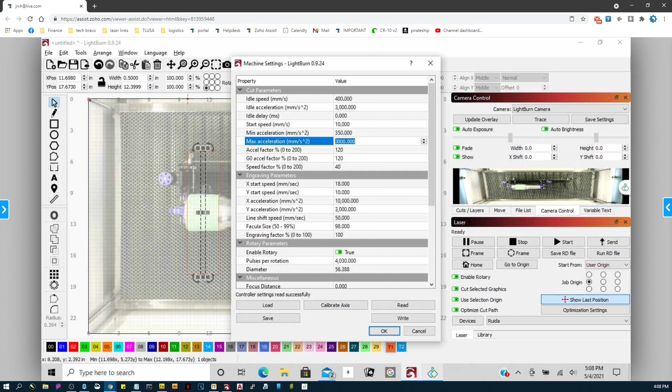Now the rotary is going to be the A-axis. You'd go back into Calibrate Axis and pick A. That way you can also dial in your steps per rotation, because this does the same thing, I think. If you requested, in the A direction, the direction the cup spins, that square to be 2 inches, and it came out 1.98 inches, you put in what you actually got, it'll fix the step length, and then you write it to the controller.

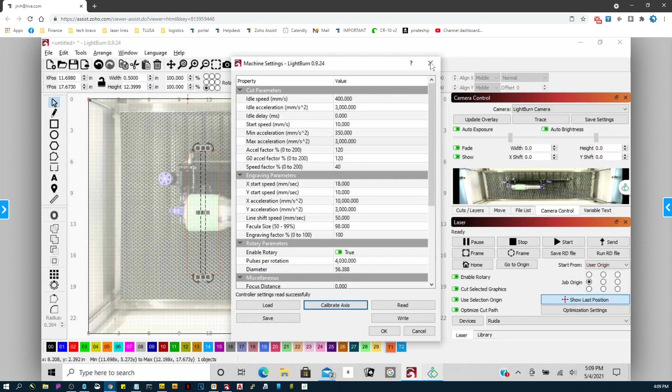So you can calibrate your axes using this tool right here and dial it in so it's absolutely dead on. Now, where you measure the diameter of the cup matters.

Because I believe that stuff is taken into consideration in how it outputs to the rotary device. So when you're in rotary setup, one thing to mention, if you ever see any erratic behavior, especially if you use test or if you frame from here, from the control panel, from Lightburn, it'll mess up. Your y-axis will start moving, and the rotary won't turn, and lots of crazy stuff happens.

I was originally doing the frame from Lightburn, and you and Chris put on there not to do that. Right, yeah, and I got it to work because of that.

Some of our old lasers, the ones with the 5-pin rotary, had a switch on it. About 99% of all the other Chinese lasers out there use the y-axis for the rotary, which means you have to unplug a connector where your y-axis goes and plug your rotary into there, or flip a switch, or turn the power off and change something. Whereas ours uses a different channel so that we don't have to take the y-axis out of play, and it's convenient because it allows these rotaries to be plug and play, and they're hot swappable, so you don't even have to turn the power to the machine off. You just plug it in and it says, oops, hey, there's a rotary, we're ready to go.

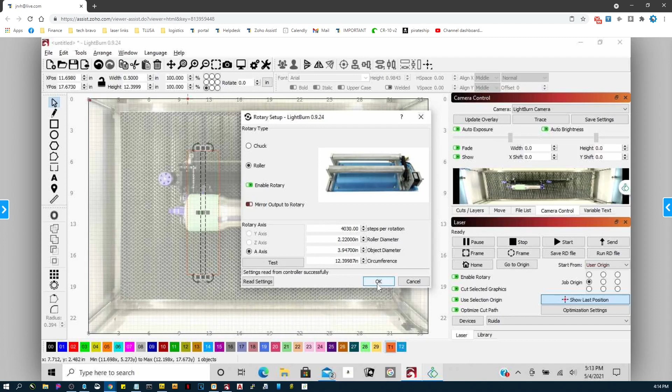I just used the caliper and done just like he did in the video, measured top, but yeah, I got it to work out. I may have to fine tune that. Okay, awesome. Well, you worked through it and did a proof that you could get it done. So that's cool, that's cool.

I've been hearing about acrylic, and I'm really liking it. I've been making keychains and stuff, but I'm getting a lot of white residue. I have to take a toothbrush and clean them, wash them. They look good, but you said something about doing something that would cut down on all that.

Yeah, especially on engraving. On cutting, if you're not worried about a flame polished edge - a perfect flame polished edge - you could just crank the air up and that'll blow all that stuff out the bottom.

Usually when I'm cutting, if I'm going to engrave and cut, I'll leave the paper masking on the bottom side and lay it on the honeycomb, and that gets rid of any of those reflections that always happen off the honeycomb instead of having to stand it up on magnets or chock it up on a piece of wood.

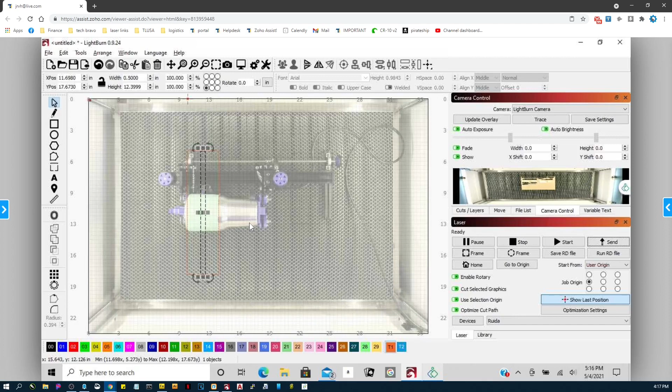If you're doing edge lit, where you light it up with an LED, one of the signs or one of the little table stands, the little holders, then you don't need a very deep engraving - you just barely want to mark the surface. And you've got a Nova 35, right? Yes, 100 watt.

So yeah, you can dial down low enough where you can get some really precise dots, and it's not as much resolution as you think.

I'm doing some experiments based on Russ Sadler's formula for photo engraving, and I'm doing the parts with the high res lens now. You'd be surprised how fast the mirrors and gantry move back and forth affects the beam signature. If you get too fast, your dots that you're trying to lay down - which is ultimately what you're doing when engraving, putting dots down - start looking like dashes. And if your focus is off or your line interval is too high, they overlap one another and it blows out all the detail. So people think, ooh, it's high resolution, I'll put the HR head on there and set it up to 1800 dots per inch and get a perfect photo. And it ain't like that.

So that's kind of what I'm going through right now. If you want to dig into that and look at it, let me pull it up in your browser and I'll leave it open, so you can refer back to it or make a bookmark, whatever you like. It's interesting stuff.

I know how the lasers work, and I know the theory behind how the laser is ionized and how the tube works, that kind of thing. But this really opened my eyes to the way it messes with the output in a practical sense.

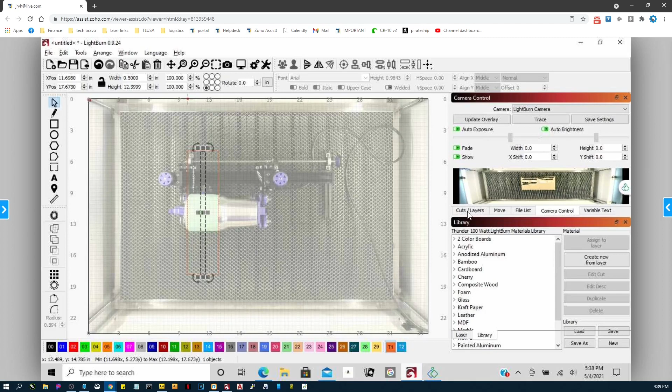I'm using it on everything. Yeah, I do too - I probably couldn't, it'd take me a minute to run a laser if it didn't have a camera on it. Well, I think I struggle - if I use the camera, I can get it to put the image on the wood where I want it. If I don't, I just can't figure out the origin. I can't get the origin to set. I hit the origin button, but then when I hit frame, it goes plumb over off the wood and frames way over, so I struggle with that a little.

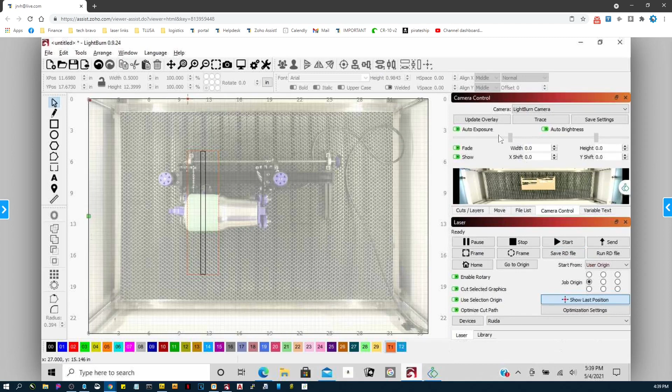Part of that is probably since you have a camera hooked on here - what happened to your tabs again? Here they are, that's doing that crazy thing. So it looks like you're in user origin right now, but you got to watch out for the camera, because if I were to update the overlay, it kicked me back into absolute coordinates here. That will throw you off every time if you go to frame from here. Now with the rotary, you can't frame from here. But on a regular job, if you frame from here - he instructed to do that - and that's the only reason I had that changed, it's being on absolute coordinates.

Using the camera you do, because literally wherever you drag it, that's where it's going to go. But on the user origin, for instance, if you wanted the top of that to be right in here, I would choose my job origin upper left, and then why is it not? Oh, because we've got rotary enabled. Turn that off. Oh, there we go. So that needs to - okay.

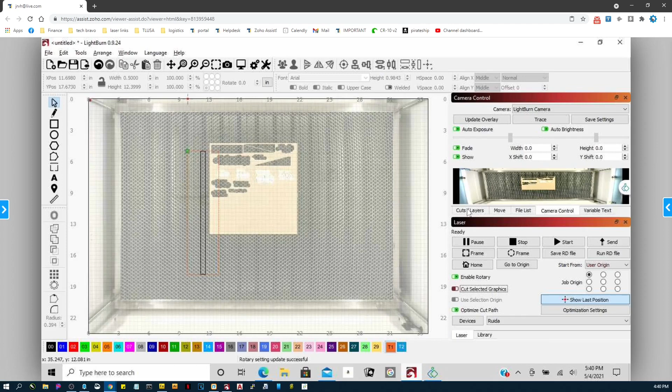Be off typically. And then we don't want to frame the tool layer, so I'm going to turn that off. So now our job origin green box is attached to the artwork, right? So we can choose all the way around here. If I was going to lay that out on a tumbler, I'd pick center, and then I would just center the red dot on the workspace.

But since we're going to lay this on flat wood, I want to put that long line, and I know it's going to go off, but I want to put the corner of it right about here, right? So I'm going to choose my job origin for upper left, and then I would take my head and move it to this spot right where the arrow is.

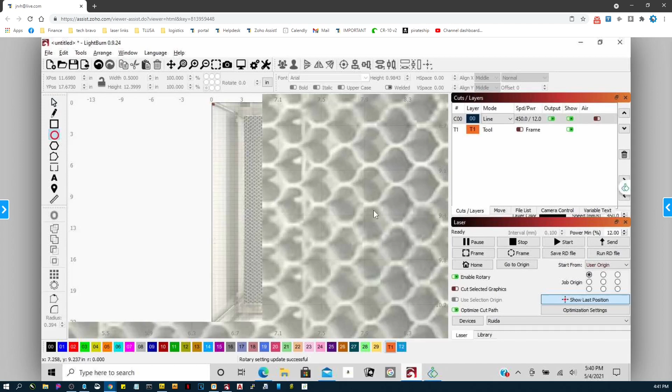Let me see if I can draw a little circle. Whoops, zooms backwards on this one. I still can't work this zoom. I'm just going to draw a little circle right here, and I'm going to make it a tool layer.

So imagine that with that material sitting where it's at, you just moved your red dot over to that little blue circle, right? And then hit the origin button. Let me get this back into view again. So, on the machine, yeah. So here, this is how that would work. You'd move your red dot to right here because I want that rectangle to sit right here, right? So I would move my red dot just right over here in this area, somewhere. I'll choose here and hit the origin button on the controller.

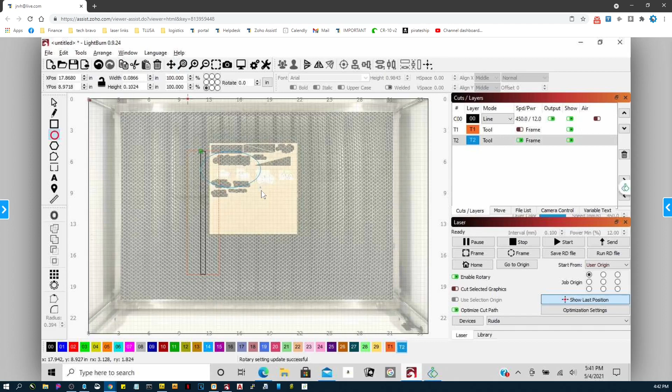And then when you go send this job over, it's going to put it. Nope, I don't want to draw another thing. I always forget to get out of that too. Control Z, escape. Now, there we go. And I got the table down now because I had that rotary in there. I'm just using this for a visual. You don't have to change anything.

But what's going to happen when you hit start? Let me get this a little closer so I can zoom in a little bit. Let's see. Okay. So here's my little dot. Why is it not? Oh, because I don't need to frame the tool thing. Okay. So this is where my red dot, just imagine I move my head over here and I hit the origin button. If I send this job right now, it's going to put it right here. Does that make sense? Yeah.

And I know it went off, but let's say for instance that your red dot... That'll be where it starts at, right? Well, no, that's where it's going to reference its cut from. It's where it's going to reference its origin. It may not start from there, but it's going to reference its origin there. It may start on the other end of it, depending on how the motion planning is set up and how your optimization settings are. So this is just for placement.

This is just to reference an origin, and you're setting that origin when you move your head wherever you move it, and wherever that red dot is, and you press the origin button, you just set the origin for that job. So then all you have left to do is figure out which job origin you wanted. For instance, let's say that we wanted to put this rectangle.

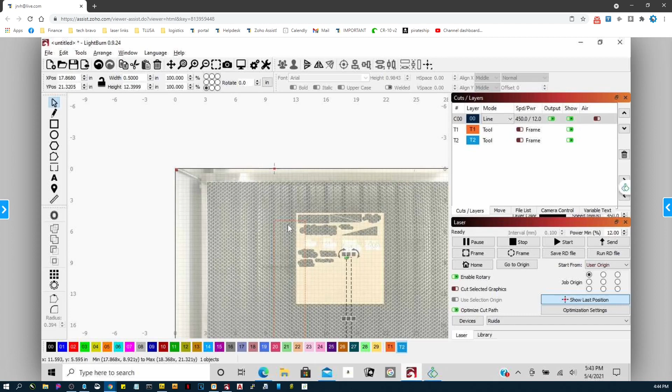Do I have to? Yeah, I don't want to mess up what you got right here. I've done that. I've got my steps for that. That was doing them for that rotary. I'm done with that. So you can do whatever you want to.

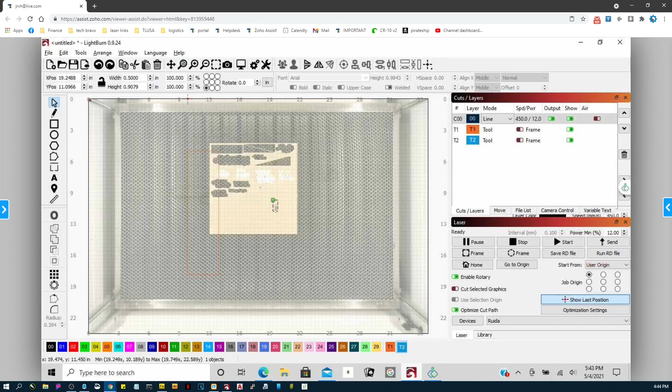Okay. Let me try to get back to where I can see the screen again. Let's just grab this sucker and make it where I can deal with it a little better. Something like that. This will be easier to see, I believe. Whoops. Okay, so let me use pan, and then we can drag this sucker, I think, and then zoom in a little more.

All right, so we're still under the assumption that you moved your red dot to this point right here and hit the origin button. And here's your artwork that you want to put there. If you have this radio button checked, it's going to put this green box in the upper left hand corner, which means when you send the job, it's going to put that green box right where you set your red dot. So it's going to do this. Now, if nothing changes except this, if you hit send right now, it's going to do this.

Does that make sense? So yeah, the key is that origin will never change unless you go over there and move it somewhere else and hit origin again. So that's important to remember when you're in user origin. If you go over there and manually push that origin button, wherever the head is, that's your new origin until you change it again or until you revert back to absolute coordinates, in which case that is ignored.

Okay. Now, let me ask you, what does the red reset button do on the machine, on the controller? The reset, it'll basically do a soft reset instead of like unplugging it and plugging it back in. It should rehome everything and get its origins again and make sure that everything's working. It'll go through and make sure all the sensors and things like that, does a self check, that kind of stuff right at the very beginning.

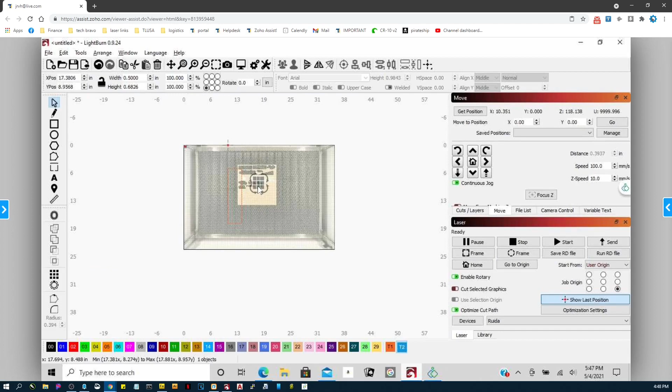But the green box is showing you where your job origin is, and the red box is your device origin, and it'll never change. And if you'll notice on absolute coordinates, your green box is up at 0, 0 also. And then as soon as we jump down to user origin, that box will jump back over to your artwork. So now your new job origin is attached to your work. And then you just choose, let me pull this back in. It depends on what you're doing. I don't know why the zoom is backwards.

If I wanted to put that square in the center of another square, I would choose my job origin to be the center, and I would move my red dot to the center of the bigger square, press the origin button, and then it'll center it right up. So if you want to center something, I would always use center origin. And this is what I use on rotary also, because all I have to do is eyeball it and make sure that it's centered up between the actual work area.

Okay. Now, while you got that zoomed up, I'm gonna ask you a question. You see where I've made the hole for the key ring, and how thick that is? No matter how big I make the circle, when I cut it out, it still leaves that much plastic around it. Is there any way to get that thinner, where there's not as much acrylic around the hole there? What I'm saying is it's hard to get a key ring on because it's so thick. And no matter how big, if I make the hole bigger, it still puts that much.

I don't see what you mean. You don't want to get it too skinny or it'll just break off. Is that what you're...? Well, yeah, but most of the ones I've been making are too fat. I mean, too thick. Okay, and you have a hard time, so you want to engrave them down where they're thinner? Just a little bit. So yeah, you could do that.

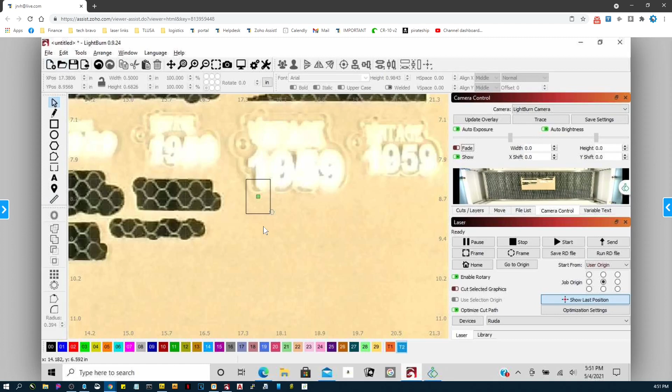I'm not sure if I follow you actually. Can you pull up the file and show me? Pull one up. Let's see. I just want to make sure that I'm on the same page with you. What I need to do, just hit new? Yeah, you can. Say for instance, this one. Where'd it go? There it probably is. Okay. All right. So tell me what your end game is on this one again.

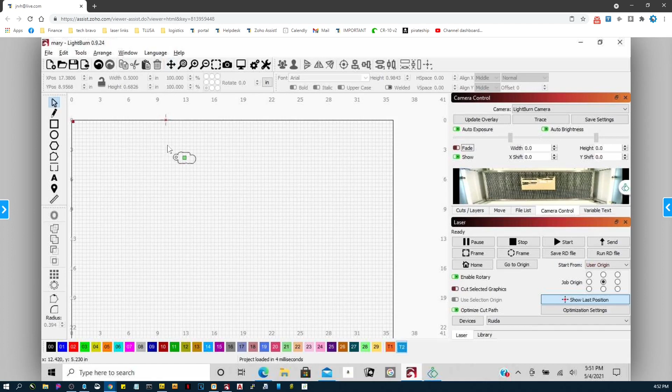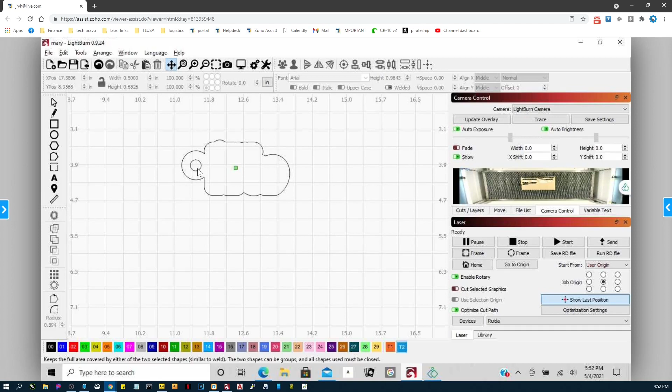It's to be able to make it easier to put the metal key rings on it. See, when I make my circle, and then I hit... You see my cursor? No, I can't see your cursor. If you select something, I can see it, but I can't see it moving around, pointing at anything. If I select, well, I'm not...

Okay, where the little ruler is over here on the toolbar, right below it, that you hit, it makes the design around the word. You type in some words, and then put your little circle, and then you hit that, and it puts the offset around it. So is your end game to make the inside circle bigger without making the outside bigger? Yeah. Okay, I do see.

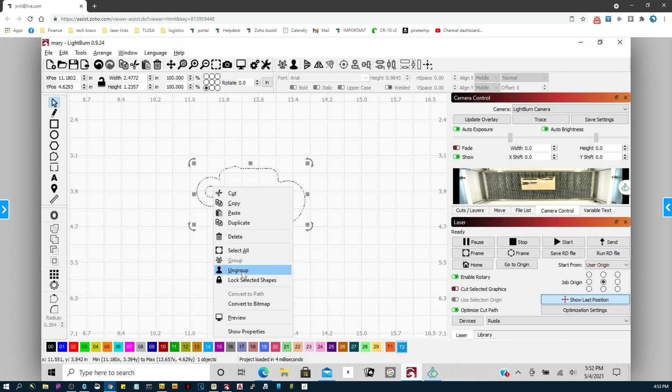And so I'm gonna select this and I'm gonna ungroup it if it is. What I opened up there isn't the keychain I made; for some reason it hasn't got the words in it. Well, it'll be the same way. Now, if you'll notice, there's another set of little boxes up here. You see those? Yeah. That selects the object origin.

Since we want to keep that circle in the middle when we change its size, I want to select center because I want everything to calculate from the center of the circle. So as we make it bigger, it won't move over to the left or right. It'll stay on the same axis, the same center point as we scale it. And then I'm going to lock that circle and you can just bring the size up or type in a size, whatever you want. That's it right there. That's what I'm making.

Learn something new every day. Yeah, I thought that's what it was. That's why I wanted you to clarify, because I didn't want to start engraving this thing and making it thinner if we could do it that way. But yeah, if that's what you were after, that's exactly it. Now here's how this can matter.

I'm going to select the upper left for this one, and then watch what happens when I change the scale. See how it offsets it? So that's why object origin is important. So I'll Control Z a couple times and get it back where it was. There we go. That may be more exaggerated than you want, but you get the idea.

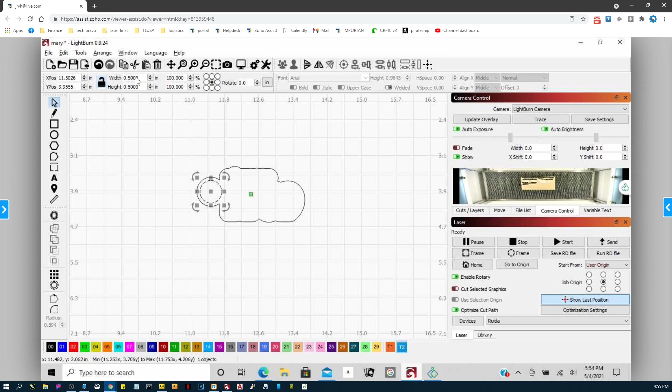Once you ungroup everything and select the object, make sure you're on center for your object origin. Then you can type in values. You can unlock the proportions if you want to, and enter the height and width individually. In this case you wanted a perfect circle, so you just change one.

So 0.25, whatever. Yeah, I need to quit worrying about messing stuff up and play with a little more stuff. Yeah, it autosaves every 2 minutes. So if I get everything out of whack, I won't be able to get it back. Yeah, well, you can hit Control Z or use this undo right here and go back all the way. Watch, we can go all the way back to the beginning probably. I can just keep hitting Control Z and go back as many steps as we need to get to the original, all the way back to the beginning.

Okay. Yeah. And I think you can redo, maybe not. It's not lit up. Okay, it didn't remember it the other way. Once you undo, I don't see the redo. But anyway, that put us back where we were. But I'll just recap since we're back here.

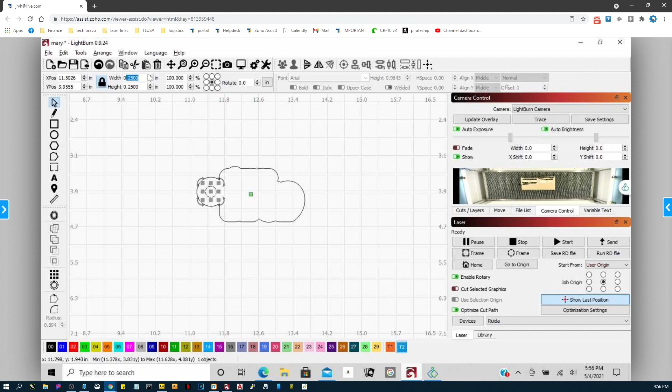In order to change just that one object on the inside, you'll have to ungroup it if it's grouped with other things. Right. And then I'm going to select outside to get away from everything. And then I'm going to select this circle. I'm going to make sure that the object origin is going to be center. And then you can basically just put in whatever value you want, 0.25 maybe, for instance, or 0.3 or whatever. But that's ideally how you'd probably want to do it. Yeah. And that's what I was after right there.